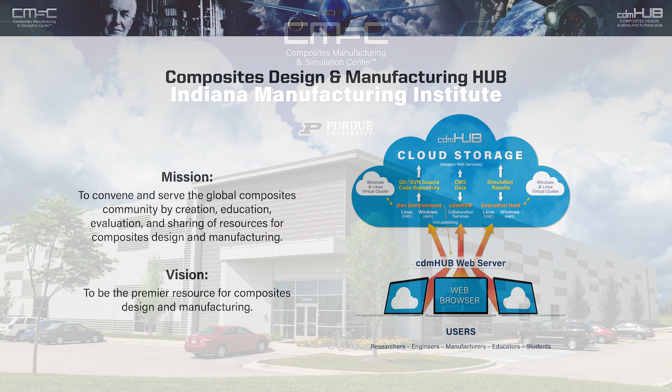We launched the CDM Hub in 2013 with the mission to convene and serve the global composite community by creation, education, evaluation, and sharing of resources for composite design and manufacturing.

CDM Hub provides a very powerful website called cdmhub.org for the composite community to carry out this mission together. We envision CDM Hub to become the premier resource for composite design and manufacturing in the near future.

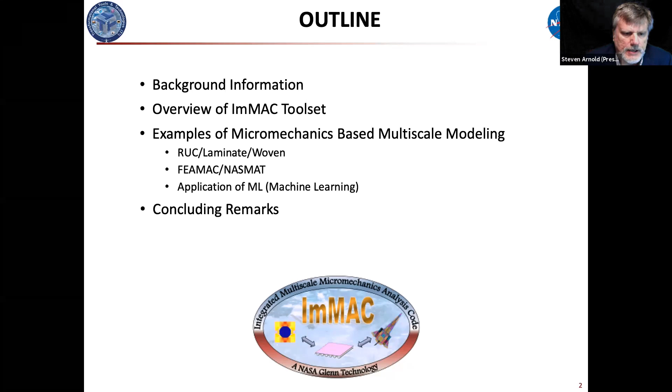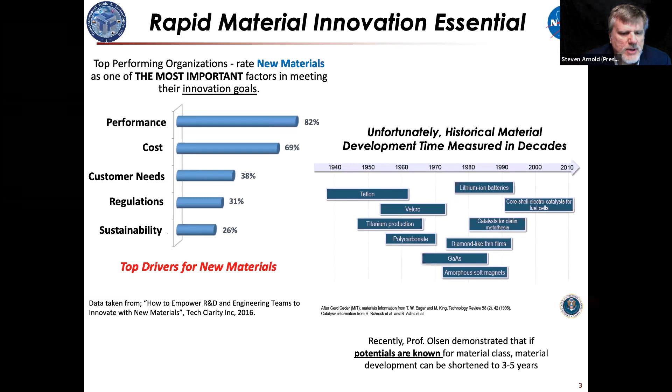Yet, unfortunately, historical material development times required to move a material from conception to full deployment have been shown to be on the order of 20 years, regardless of the material class. Therefore, in recent years, there's been a desire to reduce this time frame dramatically in order to increase U.S. competitiveness. To that end, people have turned to ICME over the last 15 to 20 years in an attempt to speed up innovation.

ICME integrates processing histories which influence internal structure, which in turn drive properties, and then drive performance of the component and structure. ICME is an approach to the design of products and the materials which comprise them by linking experimentally validated material models at different length scales.

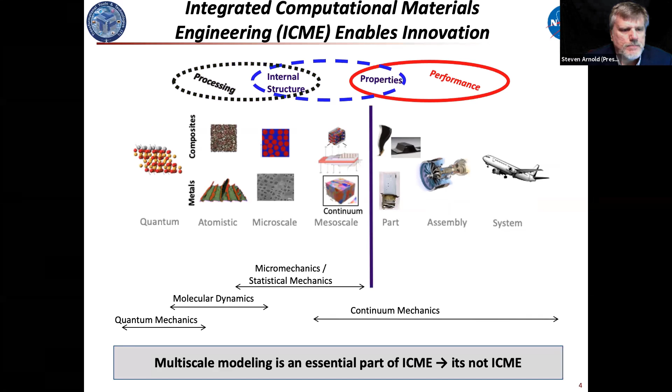But multiscale modeling, while an essential part of ICME, is not really ICME itself, in that ICME requires iteration or optimization of the various scale-specific features to obtain one or more engineering performance metrics.

Further, ICME attempts to marry two non-mutually exclusive viewpoints or paradigms. The first is what I term the traditional structural viewpoint, or the design with the material approach, where you're given known properties of the material, and from that you design the component or structure.

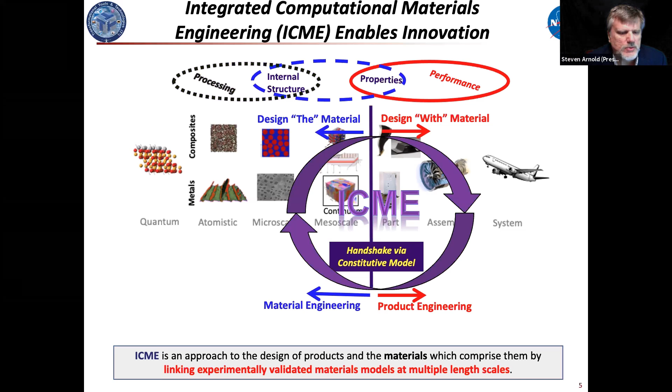Versus a more science or material viewpoint, which is the design the material approach, wherein given specific performance requirements, a new material is designed that's fit for purpose. The handshake between these two views is really the constitutive model, and the parameters and properties associated with the various materials then obviously influence the design of the components.

More recently, NASA has put together a 2040 vision, which espouses a public-private investment strategy for the design of fit-for-purpose materials and structures. This 2040 vision report is a community consensus document that addresses the technologies required to perform integrated multiscale materials and structures modeling by the year 2040.

The study engaged over 400 academic, industry, and government experts, and aims to explicitly marry the design of materials with the design with materials approaches into one concurrent transformational digital paradigm.

The document, which can be found at the URL indicated in the center of the slide here, describes a cyber physical social ecosystem that impacts the entire supply chain to accelerate concurrent design, development, and deployment of materials and systems throughout the product lifecycle for affordable, producible aerospace applications.

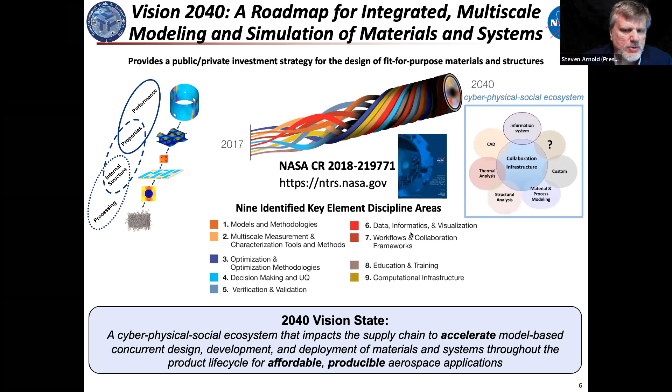Another large investment area in product development is in the area of testing. Consequently, the objective is to build a robust, validated computational framework that can provide accurate virtual testing in order to achieve significant cost savings throughout the development and certification process.

Such a framework is particularly important when dealing with composite materials, as the amount of required testing at levels 1 through 4, as you can see here, is significantly increased. Notice 5x and 100x in levels 2 and 3 over those associated with metallic materials or structures.

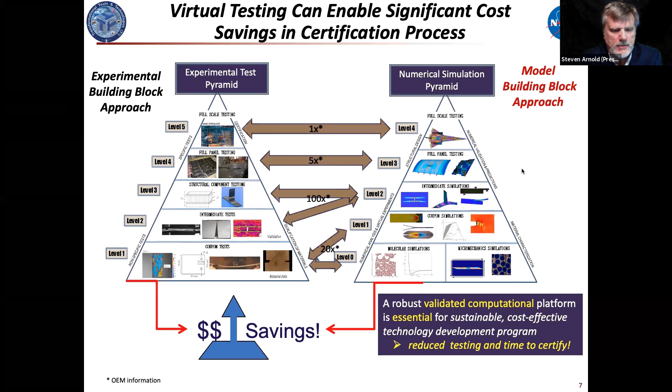So to accomplish this speed up, we really require the development of a new model building block approach, consistent with the classical experimental building block approach, thereby hopefully allowing us to minimize the amount of actual testing required during those intermediate stages of testing, like levels 2 and 3, thus resulting in significant savings of both time and money.

As a result of these motivating factors and many others, NASA Glenn has been pursuing the development of a robust composite multiscale framework. In particular, we've really focused on looking at the differences between, or the balance between, model efficiency and fidelity.

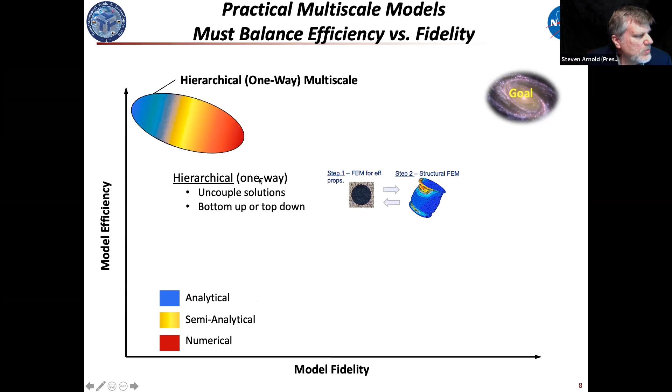There are 3 different categories of multiscale models. The first one is the hierarchical multiscale approach, which is really uncoupled. It's one way, either bottoms up or top down, and typically it's very engineering oriented, where for engineering purposes we're more interested in efficiency and we assume a certain level of fidelity. Alternatively, there's the concurrent multiscale approach, which is fully coupled.

All the scales are handled at once, and this is much more of a science-oriented viewpoint, where again fidelity is more of the objective, and speed is taken to be a little bit less important.

And then there's a third, which is what we have really focused on, and we've termed this the synergistic multiscale, where we try to take the best of both worlds. Here we're doing fully coupled, but it's hierarchical in space and concurrent in time.

This is very applicable to the research and technology area, and here I'm just illustrating that, in our opinion, GMC, or the entire family of method of cells, is actually very efficient as well as has a significant level of fidelity, and serves our purpose.

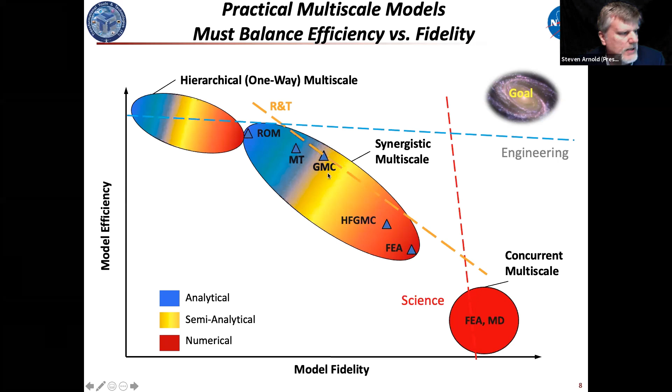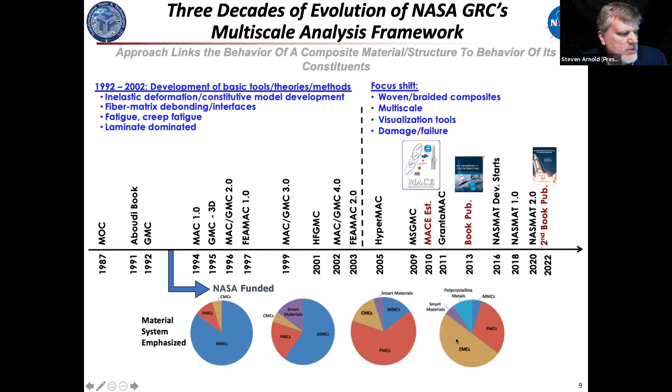And then, as you see, we progressed and moved more into the PMC regime. Now, in the last decade or so, we have been really focused on CMC materials. And that original material nonlinearity has really helped us out when we're trying to model CMCs, as you'll see.

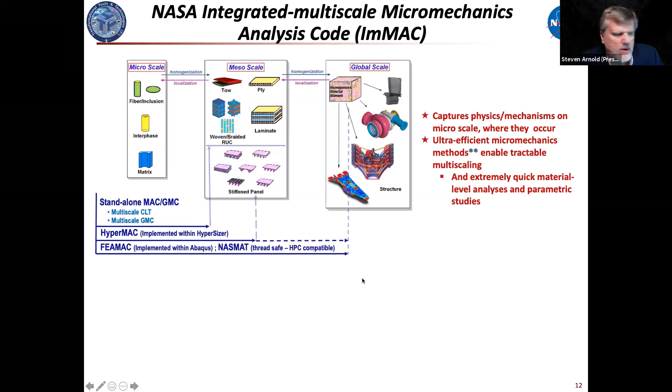And clearly, we have, as I indicated, chosen the method of cells, a family of micromechanics theories, to be the backbone of our multiscale framework.

Here we're just showing that the nice thing about this theory is that we have macro level constitutive equations that are semi-analytical, and micro level field equations as well that describe the local fields within the various constituents. All of these are able to be obtained once we have the A and D strain concentration tensors.

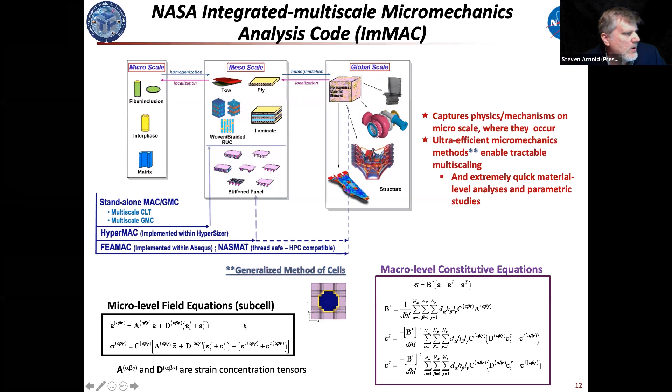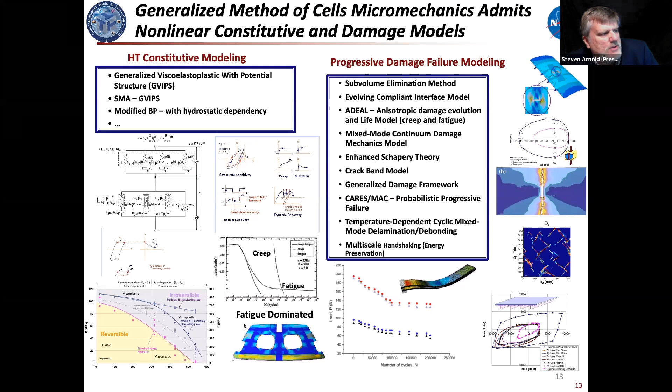Furthermore, an advantage of, like I indicated before, the generalized method of cells, is that it admits nonlinear constitutive and damage models. And we have here, in this slide, just indicating that we've built in a large variety of constitutive models as well as damage models within our tool set.

This formulation provides constant stress and strain fields in each subcell, and yet, because of the discretization of subcells, we're able to pick up gradients within, let's say, the matrix or even the fiber.

One of the advantages of GMC, though, is that it has no discretization sensitivity for a fixed RUC, but a disadvantage is that it also has no normal and shear coupling.

Alternatively, the high fidelity generalized method of cells is based on a second order Taylor series expansion of the displacement field, which provides us with a linear stress-strain representation per subcell, and actually allows us now to have normal shear coupling, which is really significant when you're dealing with disordered microstructures.

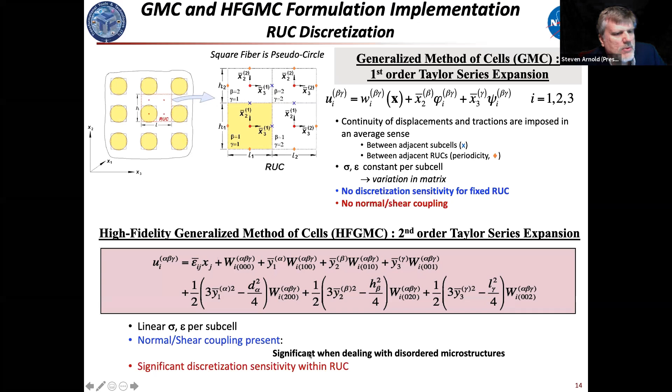For more information about the theory and the details that go into that, I recommend you take a look at our two books, Micromechanics of Composites, and our most recent book that will appear this summer, called Practical Micromechanics of Composites.

Also, just to note, this book is actually going to have a MATLAB open source code that complements it, providing access to Mori-Tanaka method of cells, generalized method of cells, and HFGMC. It can be obtained at this link here, which is NASA's GitHub page.

So, just to give you a quick 30,000 foot view, the ImMAC suite has a core micromechanics capability. It's very modular. We have both GMC and HFGMC, as well as PHF GMC, which is a parametric formulation of GMC, CUF, Mori-Tanaka, and we can even allow any other micromechanics theory to be implemented.

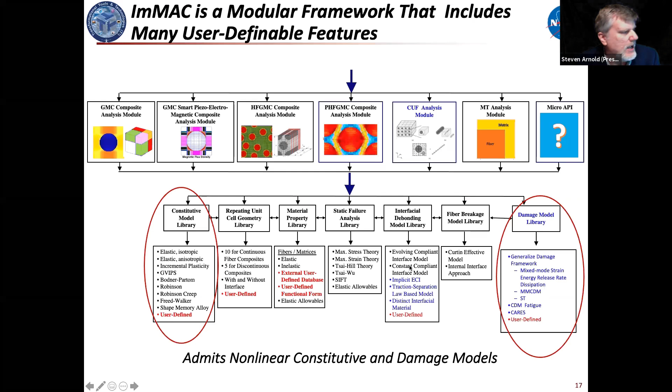This is done within a recursive algorithm, and each one of these micromechanics theories can pull from a library of constitutive models, repeating unit cells library, the property library, static failure analysis, interfacial debonding library of models, and fiber breakage and damage models. We're continuing to include more modules all the time.

And our most recent tool works on a high performance compute platform.

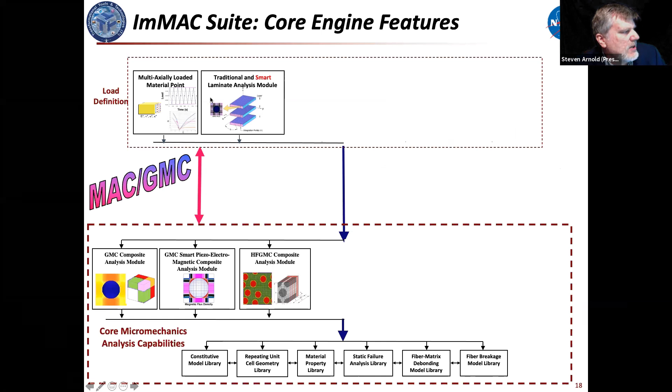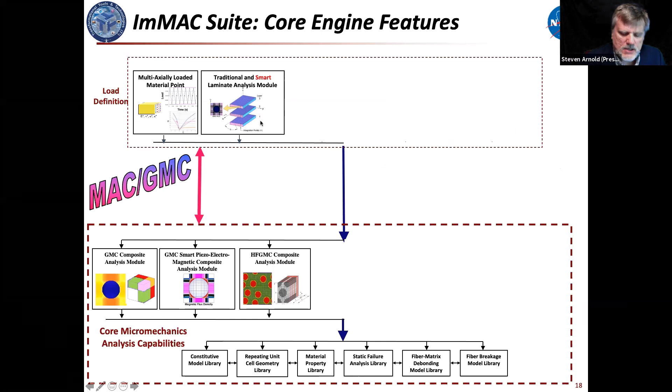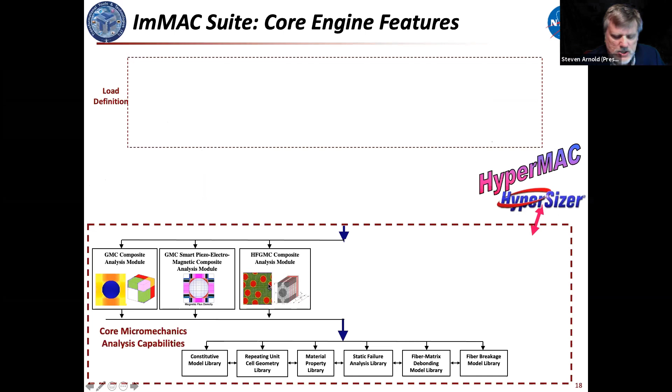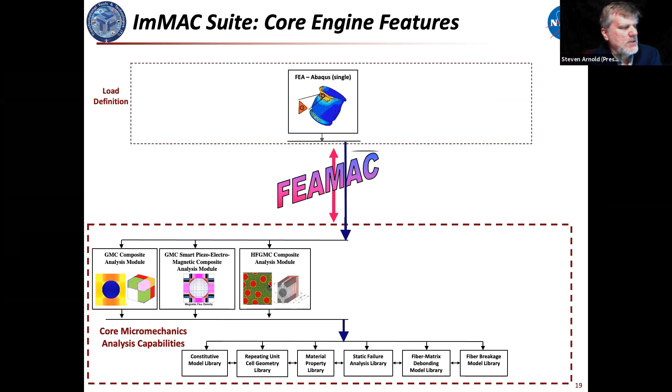The legacy tools now are like MAC/GMC. It basically just calls the generalized method of cells and the high fidelity generalized method of cells, but it can have loads applied, multi-axial loads applied at a given material point, or you can do micromechanics based laminate analysis with the Mac standalone. HyperMAC interfaces with the HyperSizer code, and it basically calls just GMC or HF GMC as options. FEAMAC is our legacy implementation within Abaqus that runs on a single CPU because FEA Mac was not thread safe.

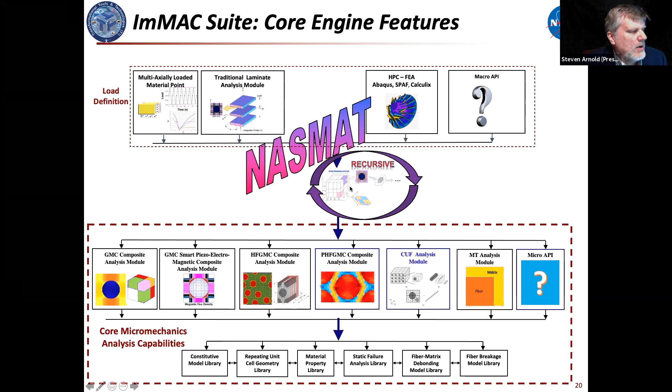And our most recent and advanced tool is NASMAT. NASMAT can interface with any given third-party software through the macro API. We've so far connected it with Abaqus, SPAF, and Calculix, which are other finite element codes. It has the ability, which is quite unique I think, to recursively engage any given micromechanics theory at any level within the analysis. You'll see some examples of this coming up.

With respect to the tool set here, this lists the core capabilities of the tool and shows you our customer base. We've had the good fortune of having a fairly large customer base that's used our code since 1995 - 75 universities, 90 industrial companies, and 15 government labs have made use of it. It is available free to U.S. citizens and organizations.

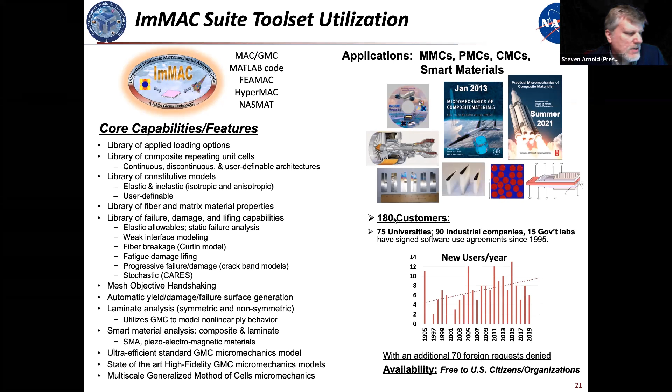Now let's move on to some examples to show you some of the benefits of the tool set. Here we're mainly going to be illustrating the Mac standalone capabilities with respect to laminates and woven composites.

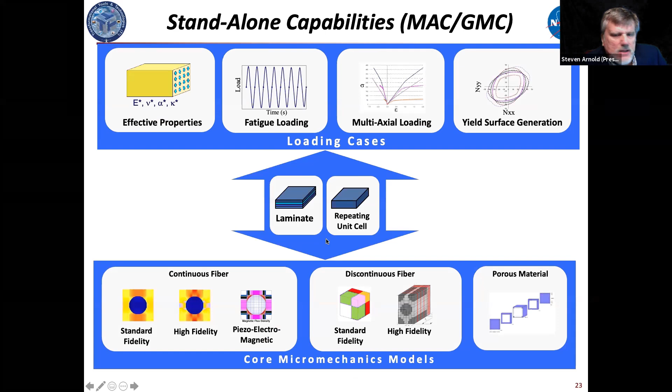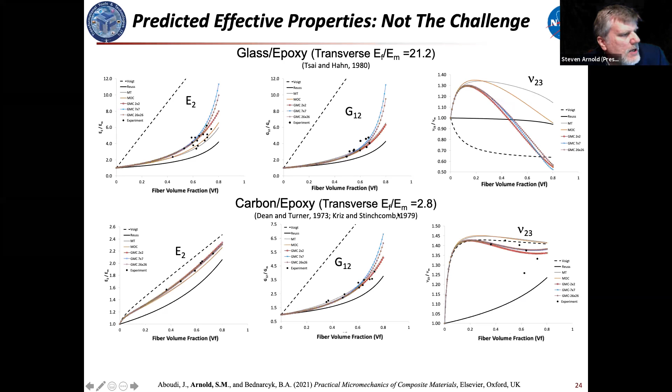So let's touch on really the power of micromechanics, and that is that it provides access to the local stress states and stress and strain fields.

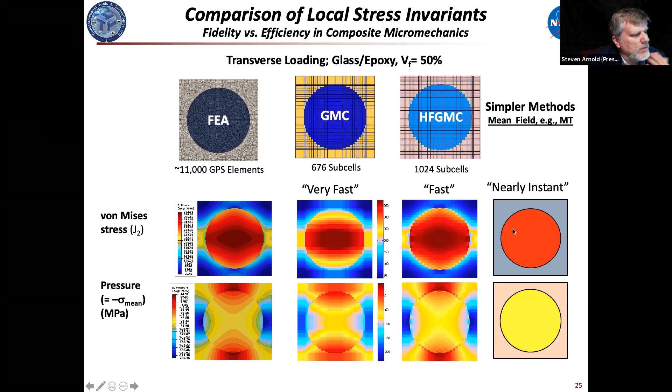And the point, getting back to this balancing of fidelity versus efficiency - here you can see GMC we kind of rank as very fast relative to finite element, HF is fast, and obviously the simpler methods are nearly instantaneous. But again, they only give you a single point within each constituent.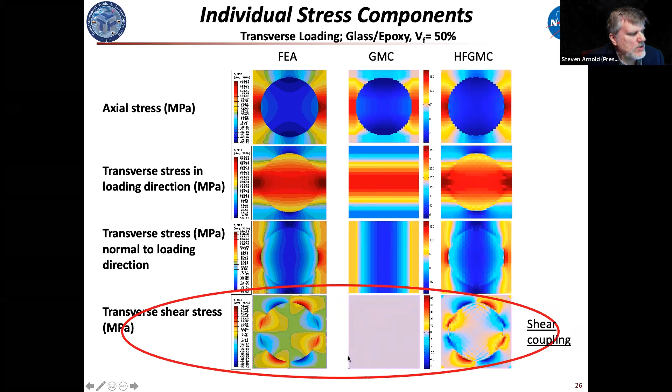We're pointing out here that there's no induced shear stress due to that normal transverse loading, whereas in FEA and HF GMC, you do actually see shear, but obviously the average of that shear is zero, and does agree with GMC.

So now with those local fields, we get to look at failure and deformation. Here I'm showing initial failure surfaces, which are margins of safety, for two different types of problems. Here's one is the SiC/SiC BN system, where the yellow represents an interface material, the BN interface material, and we're just showing a margin of safety curve.

The green here doesn't have any interface, that is, the yellow material properties are the same as the green. The blue shows what happens when you do include an interface, yet you're not allowing it to actually fail. So it's providing you, because of the compliancy, a smaller surface. But when you allow the interface to then fail, you're getting a very sharp failure along that transverse direction, and it's significantly underneath.

One of the nice things here is you can see not only the different failure criterions in the different domains, but also we can pick up with micromechanics, because we have access to local fields, which phase is actually failing. Here it's the matrix, here would be the interface.

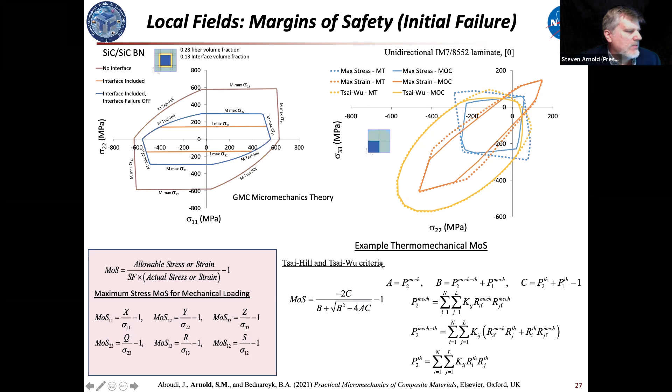And we actually have developed full thermomechanical margins of safety as well. Now moving on, those were more initiation surfaces.

Now, we can have initiation, but we can also move beyond that and allow progressive damage to take place, where we allow each subcell to continue to damage, and then the accumulation of that damage ultimately results in, let's say here, the zero-ply failure of a quasi-isotropic laminate.

One of the interesting things, as you kind of saw from the previous slide, is there's a difference between failure theories when we're speaking about initiation, but when we get to the final failure and propagation has gone on, the significance of the failure theory selected diminishes significantly.

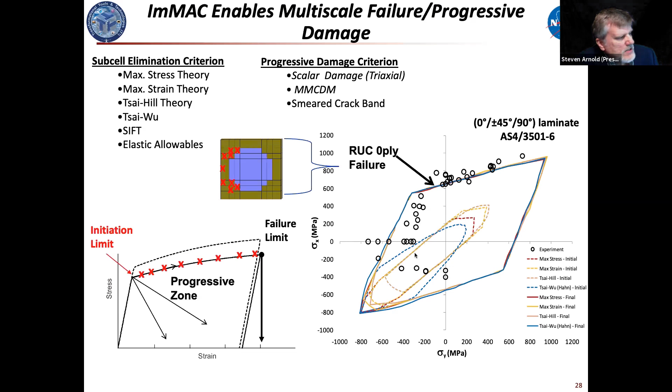Once we've done this for an RUC, we can take that RUC and plug it in at an integration point within the global finite element solution, and have progressive damage take place at the global scale, where the finite element redistributes stresses throughout the structure based upon failure at the various integration locations. The micromechanics then deals with redistribution of stresses within the RUC due to damage at various locations within the structure.

And this is done iteratively until you can predict component failure.

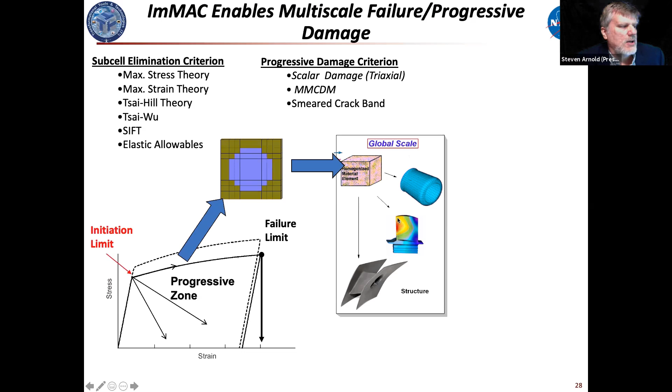Here's an example of a progressive failure analysis of a disordered PMC with MAC GMC, where on the left we're showing transverse tension of a glass epoxy system, or the mode 1 failure, and you can see the singular crack is able to be predicted. Here's a finite element comparison, and the agreement's reasonably well between the two.

Then on the right hand side is a transverse compression case, which is a mode 2 failure, and we're able to pick up the diverse cracking that takes place under that. And depending upon the disorder of the microstructure, the values change.

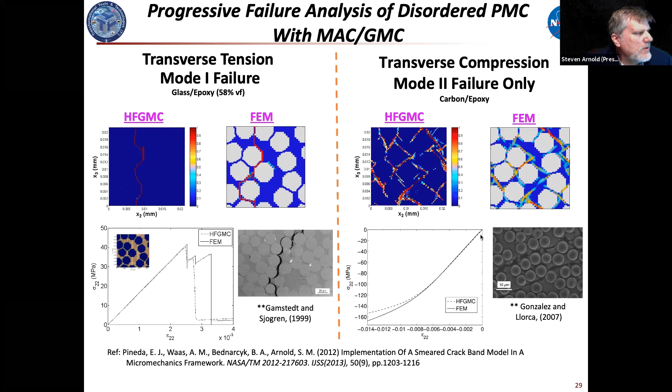Here's another example of multi-scale modeling of CMC behavior. Here we're showing two different types of problems: the first is a woven system, the second is a laminate.

We've done a significant amount of investigations of the stochastic nonlinear response of woven composites, where we've varied a variety of the different features at the local or lower length scales, and observed how they influence the behavior at the structural or global composite level. Here we're just showing some illustrations where the nice thing is you can see the composite would go up, have failure, and then when you unload, you actually come back at a different stiffness due to the fact that damage is present.

We're also showing here the in-plane modulus and the out-of-plane modulus, and you can see we're able to pick up the distinct difference between those two due to void pattern within the CMC. You can also see that the evolution and degradation of those modulus take place, and they're different as strain is increased. And of course, we can look at the probabilistic aspects of the stress strain curves and properties as well.

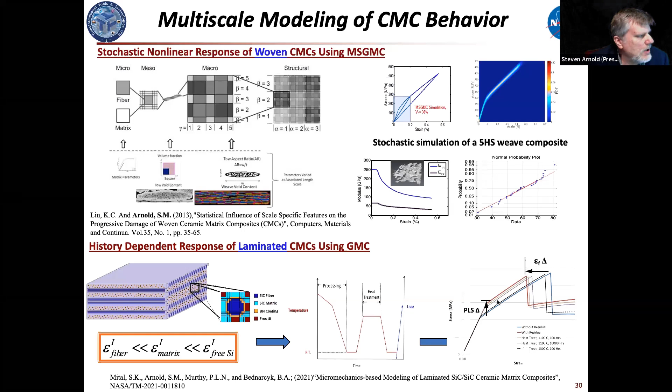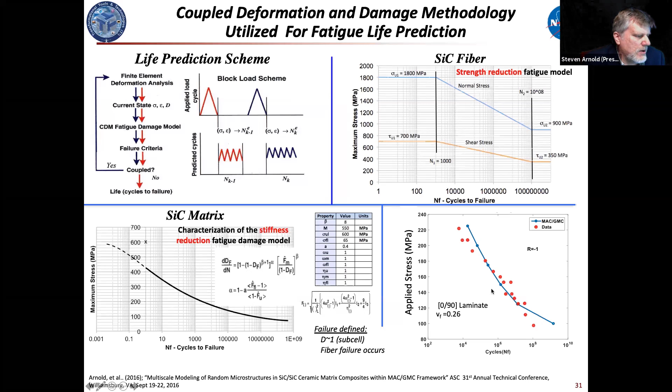Also, a little more sophisticated analysis involving fatigue. Here we're illustrating the implementation of a coupled deformation and damage methodology that's cyclic. The important aspect of how we deal with it is we have two different types of failure. For a fiber, we reduce the strength as a function of cycles, and we allow that strength to plateau and stop due to saturation of interfacial effects on that degradation of fiber strength. We also do a stiffness reduction of the matrix, and combining these two, we're able to reasonably accurately predict the SN curve for a 0-90 laminate at temperature.

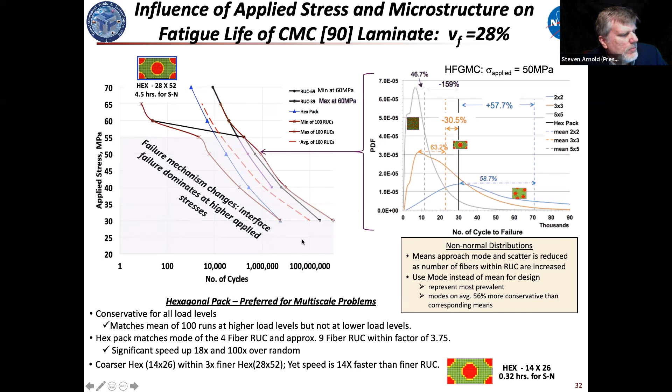It allows us to estimate life very reasonably, and we've also realized that the hexagonal pack would be the preferred analysis for multi-scale problems due to its efficiency over trying to deal with the stochastic nature and having to run hundreds or thousands of full multi-scale problems with different microstructures.

Really tying in with this is an idea in the literature: most people have done studies with microstructure on a 90 laminate only. Here we're looking at what the response is in a laminate situation, in particular a 0-90. You can see that the variation here is reduced quite significantly due to the presence of the zero ply, and in this case it's 62 times less variation in a 0-90 laminate.

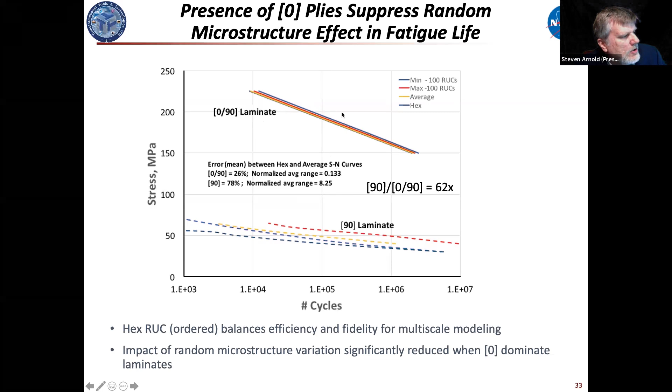So that's something to keep in mind from a practical standpoint: more than likely, for laminates dominated by the zero ply, you're not going to have to worry too much about the microstructural details. Here's another example we've done with respect to predicting woven carbon phenolic TPS material properties, and trying to design a better composite for that environment. This was a four level analysis, and what was interesting here is we actually used first principles results for the properties of the various constituents, then looked at a fairly detailed RUC.

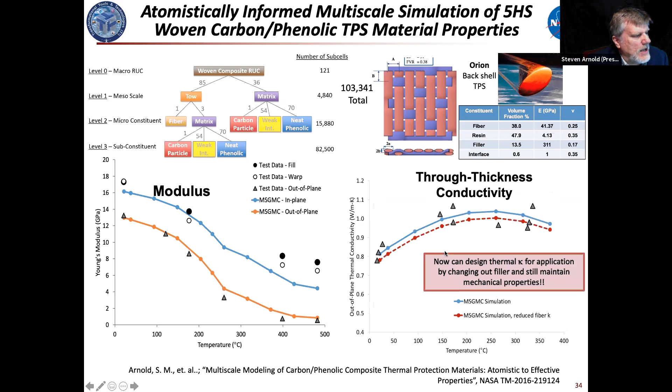We were able to predict the modulus for both in-plane and out-of-plane quite reasonably relative to the experiments over the full temperature range of 500 degrees here. And we're also able to predict the in-plane thermal conductivity and the through-thickness conductivity as well.

So moving on now to a full integration within the FEA software. Here's an example of an MMC that we did a number of years ago, where we're looking at strength distributions. Here there's no strength distribution spatially, so the strength is the same throughout the entire specimen. And clearly we missed the prediction with respect to experiment.

But when we took into account the statistical variation of the fiber, in that we spatially varied the strengths of the fiber, we were able not only to hit the value or predict the value of the overall failure of the coupon, but the location of the failure was also able to be predicted quite nicely.

And the lesson learned out of this was when you start taking into account distributions, clearly you need to be careful and not impose symmetry boundary conditions or whatever, because that would bias your predictions significantly.

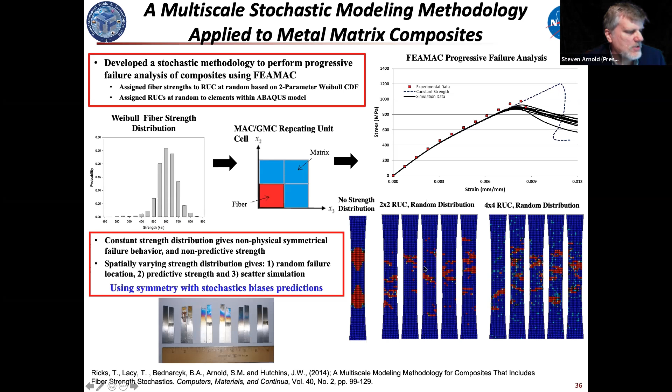Next, here is another example of a recent study that we were involved in. The Air Force had a Tech Scout study where they asked 7 different vendors or modelers to come and do blind predictions of 3 different layups. Here I'm only showing 2, layup 1 and layup 3, a quasi - one is hard, let's say, and one is a soft matrix.

Overall, everybody did reasonably well. I think the overall blind predictions were within 20% for everyone, and the recalibration, which they allowed us to do, was 10%. Again, kind of the point of showing this slide is we're showing here 2D shell predictions as well

as the 3D, which are in blue. And what was interesting to us is the fact that we characterized our parameters using MAC actually and lamination theory, and so it was interesting that the 2D shell was much more accurate than the 3D. And that just ties in with this idea of idealization, consistency, and the need for that.

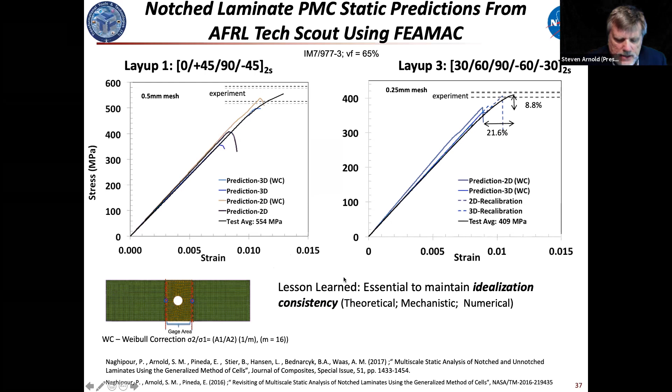Also, we've had a variety of our users provide us feedback on their verification and validation activities. Two notable ones here were Additive Manufacturing Innovations, LLC, where they were looking at tailoring the microstructure of turbine discs.

And then GE, I think they probably have been the heaviest users of our code, and they told us about a 4-year AFRL study that they did, where they were able to successfully predict CMC smooth bar, open hole tension, and single edge notch specimen behavior using our tool set.

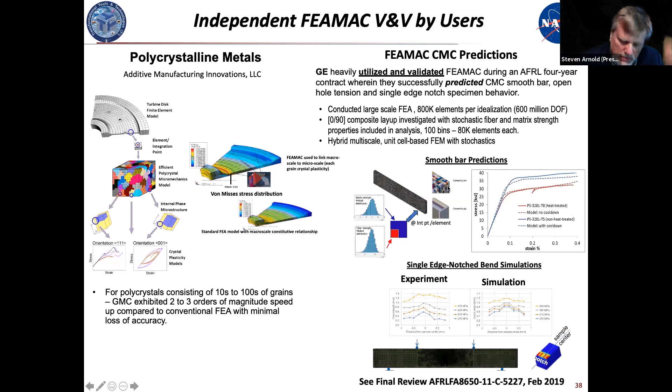And you might notice here, too, they were getting up into 600 million degrees of freedom problems, and obviously this would take a very long time on a single CPU, and this was one of the impetuses that we had for developing NASMAT. And NASMAT is our HPC multiscale analysis tool.

It's a complete redesign of our tool set, or of our prior FEAMAC implementation. The memory is changed. The whole modular design has been changed, and it's much more plug and play. It has a lot more user functionality. It's better maintainability and upgradability, and of course, it's high performance.

And with that, we had to make everything thread safe so that it could work within a high performance computing environment. Like I said earlier, it does allow us to have implementation of multiple micromechanics methods. So we're moving even beyond the method of cells family. We've implemented Carrera unified formulation and the Mori-Tanaka method as well.

And I think one of its claims to fame here will in the future is going to be this seamless handling of the multiscale recursive micromechanics, so that any of these micromechanics models can be called at any level of scale. Also, we're moving to these application program interfaces, which allows us to integrate with third-party micro and macro mechanics codes.

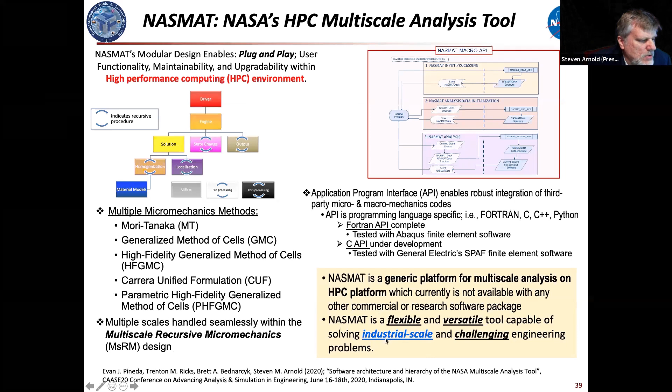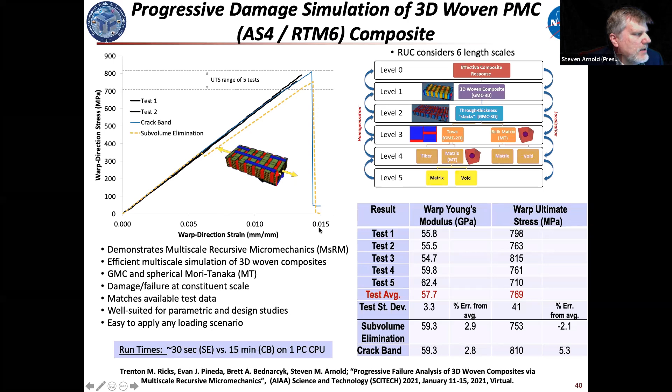We've also done a lot of scaling performance studies to try to understand how things are working, and what differences it might make between having really discretized models at the global level versus more discretized or higher fidelity RUCs.

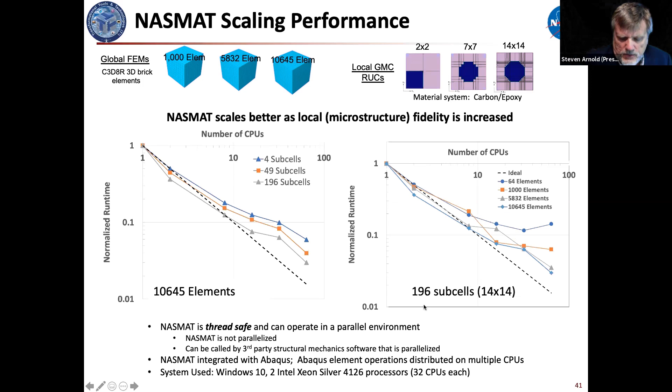Now I'm going to go into kind of real quick here some insight into where we're heading in the future, and that is again with this idea of speed, we have started investigating machine learning.

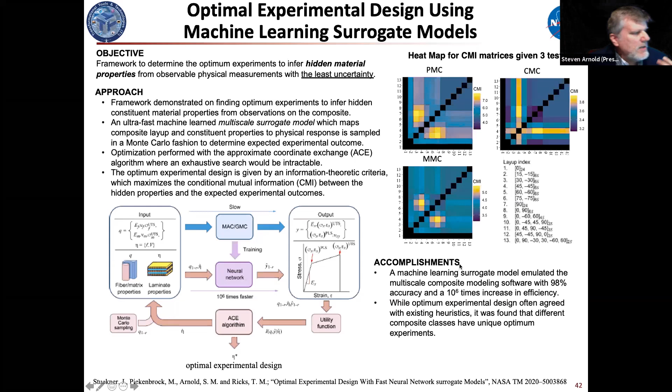After doing this, we decided, hey, let's go and actually model the entire multiscale instead of just applying it partially. And so instead of just 5 points, we wanted to map the entire stress strain curve.

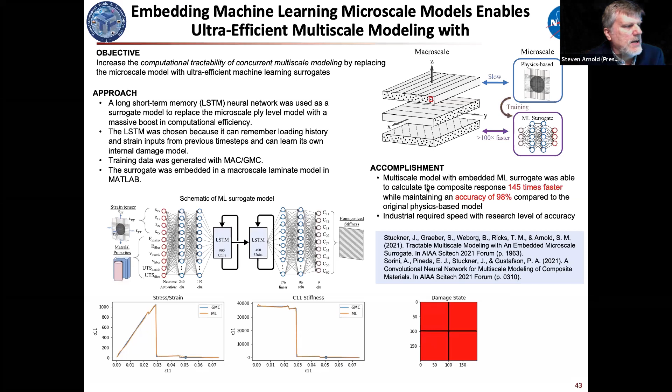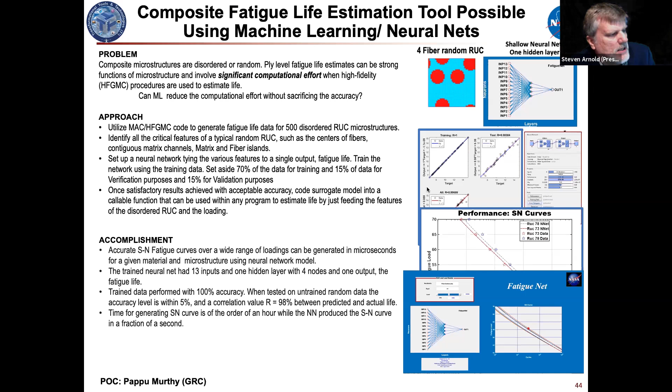Finally, as a final illustration, we're now thinking about the thousands of hours that it would take for us to compute fatigue life. So we're now in the process of developing a composite fatigue life estimation tool, so that in microseconds we can actually produce a stress strain or an SN curve for different laminates or different microstructures or the combination of that, and provide a designer with an estimate of the fatigue life. That's another project that we're currently working on.

So in conclusion, I just wanted to say that efficient design with the material can be obtained and is required for utilization of composites.